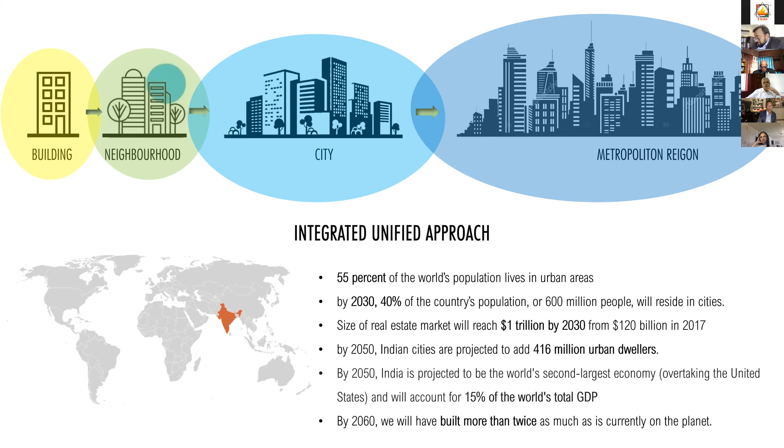One common thing observed in all these cities is that they had a very robust, thoughtful vision plan and master plan. They worked with a proper master plan and spent a lot of time laying down their requirements - something very much relevant to the integrated approach. The city has grown in a very systematic and appropriate manner, and that's how they enjoy the best hygiene and benefits of their city growth.

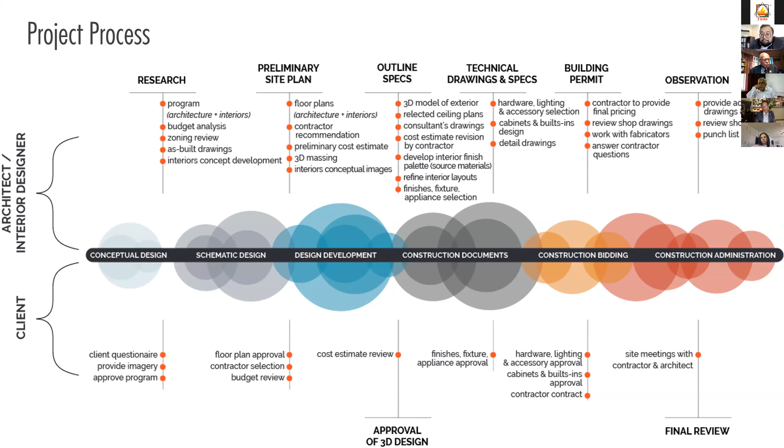Many of the good project proponents spend a good amount of time before the project takes off, and then they get into an actual design initiative. At our office, we call these the 3 golden rules: pre-design studies, all consultant experts should be on board on day 1, and use the best technology software.

Pre-design studies must also be very comprehensive. You must understand the client's aspiration, vision. You must do a detailed socio-economical survey, all environmental parameters, microclimate responses, physical surveys, understand the statutory rules, codes, and other standards that has to be applied, and most importantly, client's budget and timelines. So develop a very robust and thoughtful design program and a project design-based report.

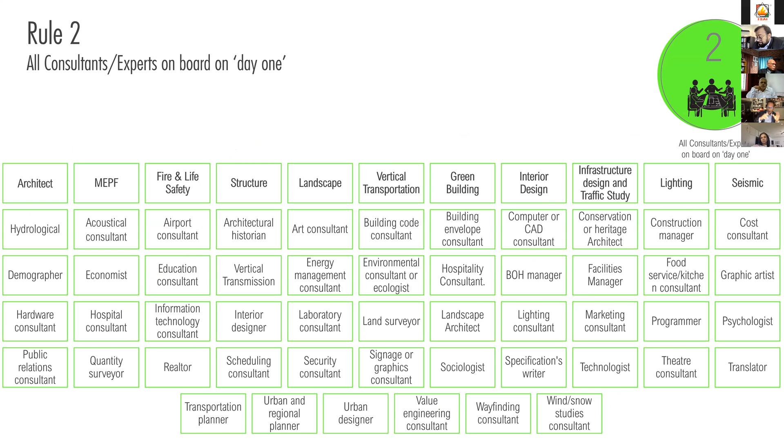These are the array of multiple diverse talent that is required for any project. Like architect Jabin said, being an architect, we have been given that leadership, but many times I also feel guilty, and I must confess - how many times do we really take care of each of these people? So we made a rule 5 years back in our office: all of these people should be on board on day 1, so that you take their very valid and very important inputs right at the inception of the project.

You have a lot of softwares. Today it is technology which is there with you for the drawings and 3D modeling. You have wonderful softwares for rendering and presentation. There are softwares to validate your scientific and engineering parameters. And of course documentation is very important for a large size project. So you must take the fullest benefit of these softwares and ensure that your team is in sync with the current practices which are there in the market.

Revit is one of the best tools. Revit gives you an idea right from pre-design stage up to as-built stage, going from LOD 100 to LOD 200 and so on. And the beauty of Revit is that it can be compatible with BIM, where you have a basic model which gives you 3 dimensions. The 4th dimension that can be added is timelines. The 5th dimension that can be added is money. The 6th dimension is sustainability.

Most importantly, this virtual digital tool goes into the hands of the facility manager who's not doing any trial and error method of a built environment. They maintain, operate, upgrade, and scale up the property in a very judicious manner.

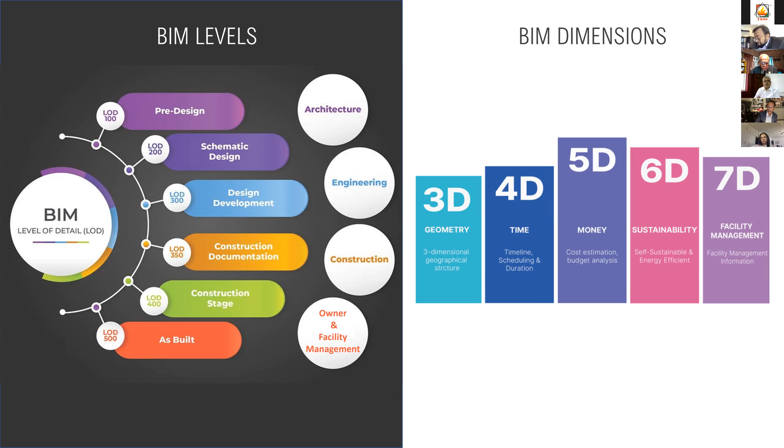Aconex is one of the very important tools for communication. All of you will agree with me that when it's a project of a large size, you have more than 400 to 500 technicians, technocrats, architects, and consultants working on it, added by the suppliers and contractors. To bring all of them onto cloud-based documentation, it's very important that the documentation is also done in a very appropriate manner, and this has really helped us in a large way. This is a very user-friendly software that should be utilized especially for large size and complex projects.

Now I will move on to a few case studies. This is one of the projects where we were blessed with a good client who wanted us to work on a LOD 300 to LOD 500.

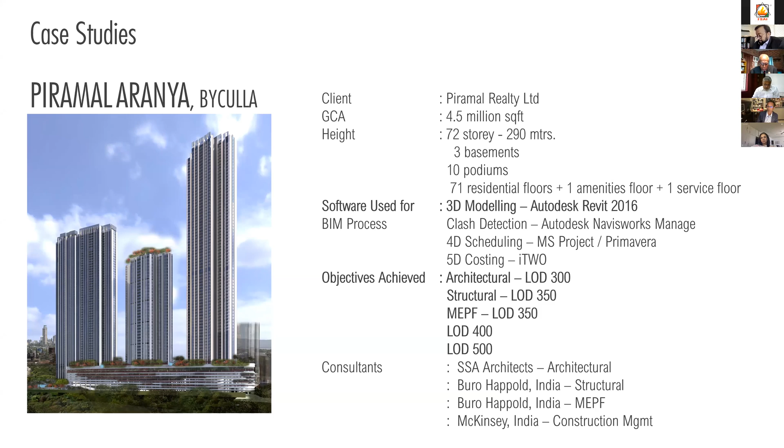That means our Revit model then was further enhanced to the cost index, to the time index, and also to its entire sustainability index. A 72-story building with 3 basements, 10 podiums, extremely complex building, having almost 4.5 million square foot on a piece of land which is just 20,000 square meters, 28 times the built area on the plot. So imagine the kind of complexity it had.

We had to ensure that all clashes were detected properly before it breaks ground, because there is no time to do any mid-course correction for such a high density project. So this was an initiative over a period of 5 months where the entire built environment is captured into a digital model, each and every corner tested, each and every component, may it be mechanical, electrical, plumbing, or firefighting. So the client has an opportunity to do proper value engineering and also manage cost and time. These are today's best practices.

And I think these are allowing us to bring all the talent together. Another project where we were blessed to have a tallest mixed use project.

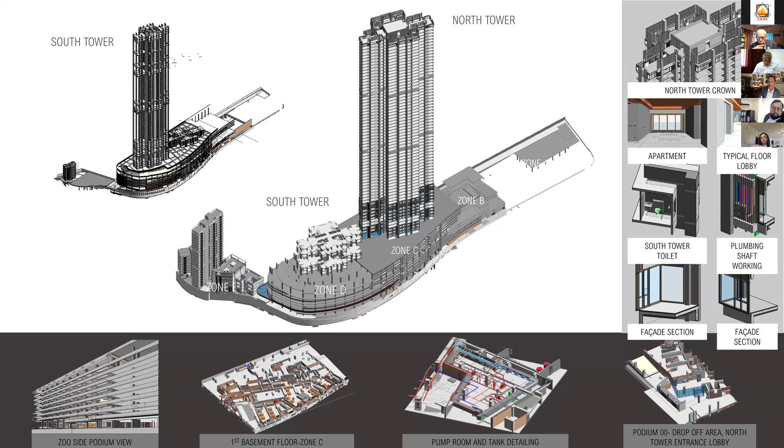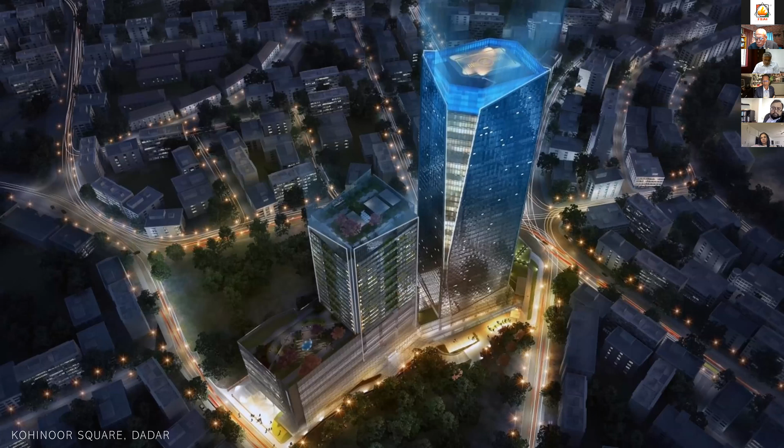Now it's the third tallest in the country, 2.6 million square foot, right in the heart of Mumbai city, which has a helipad on top of it, a tower which has offices, a retail block below, and a luxury hotel on top with the residential building around. So it has, again, multiple involvement of structure, mechanical, electrical, plumbing, firefighting, facade, and so on.

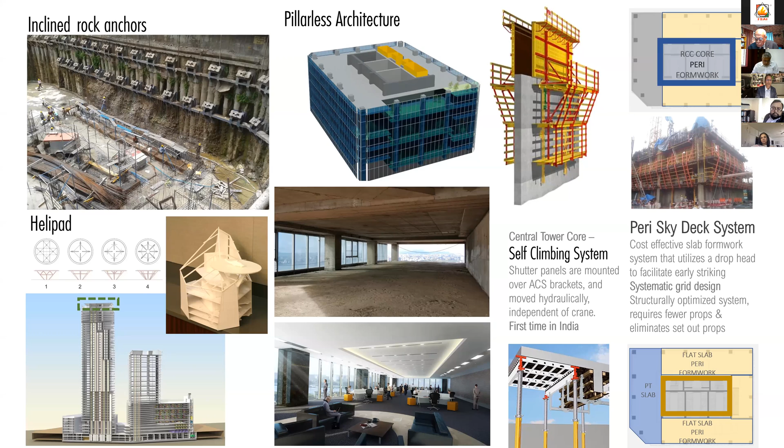So it was very important for us to ensure that, again, we do this project on a software which can accommodate everybody's input and put it together in a judicious manner. This chart explains the automatic climbing system, which can be worked out again in the digital model and so on. This talks about the kind of facade studies where we have Mumbai being very high on cyclonic winds for a 6 kPa pressure.

And what we could do is create a nice energy center where all our DG sets, transformers, everything is accommodated. And through a tunnel, we give these supplies. So again, an example where everything was cracked on a software before it could break ground, and then it was executed. The numbers are astonishing.

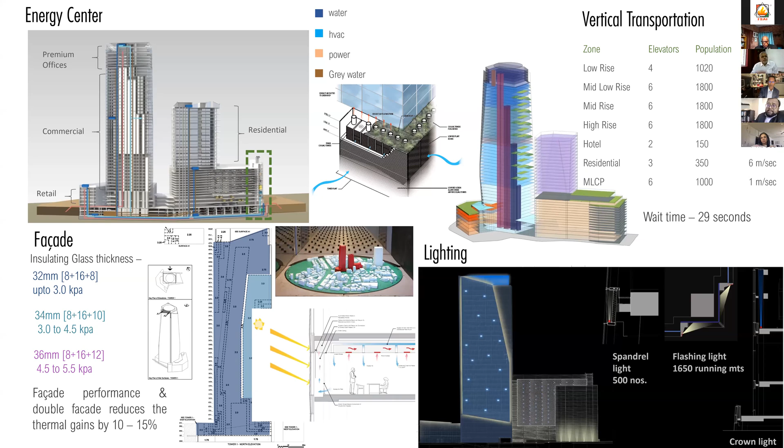1 million liters of water required every day, 34,500 square meters of ducting. So this kind of scale is impossible for any human brain energies to contemplate and work. So again, the message here is to take care of these issues through proper use of software.

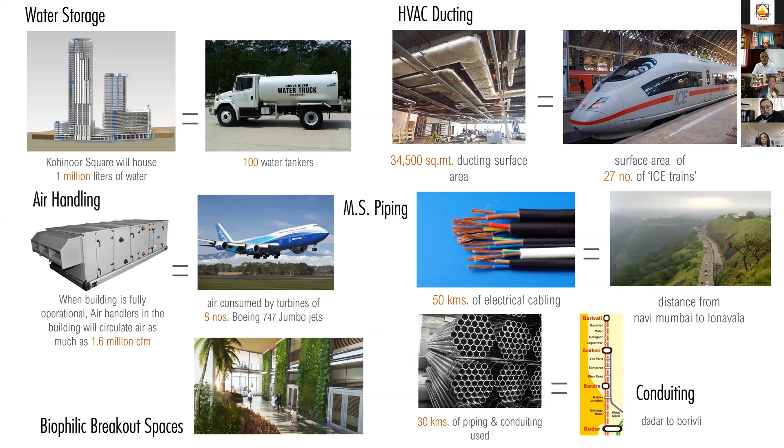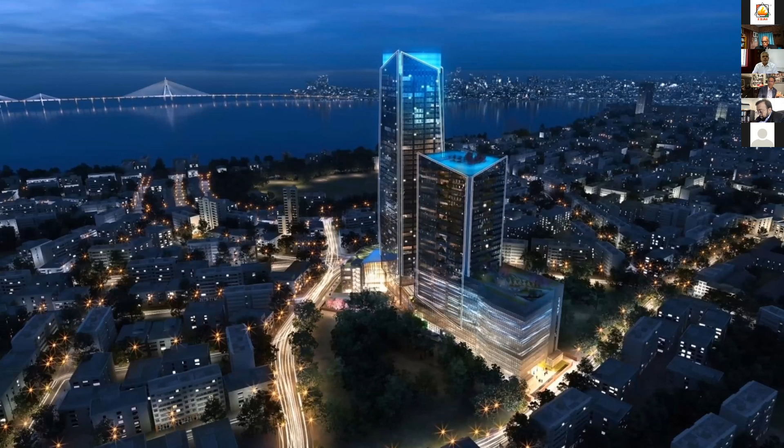So we are happy that this building is going to see its launch very soon. It's a complete flagship project in the city of Mumbai. And after a long time, with a lot of efforts with several stalwarts, we would be seeing this project actually getting occupied. Some of the pictures of the project.

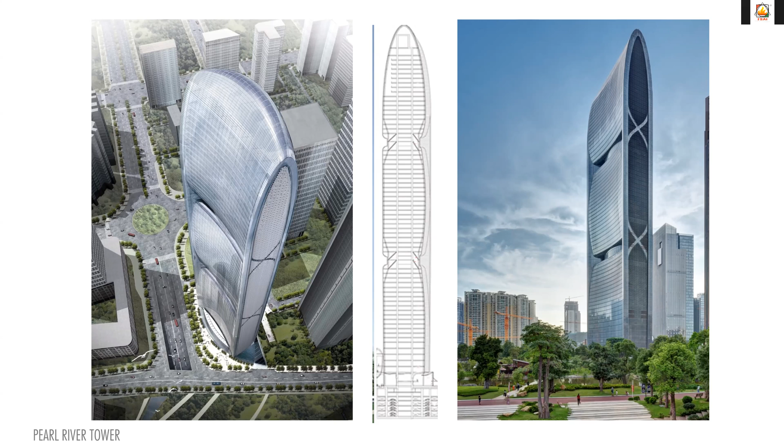Another best project, which I always like to discuss, is the Pearl River Tower on the bank of the Guangzhou Pearl River. This is something where an architect has done a great job. What is available to you when you go tall is wind. So the shape of this particular building is designed in such a way that it's like a sponge. It has those kinds of contours on the building which allow you to harvest wind.

So all that wind which hits the facade of this building enhances the aerodynamic velocity of the wind and takes it to the mechanical floor where there are wind turbines. And those wind turbines generate renewable energy. So tall buildings do not necessarily only consume, they can also generate. This is a great example of how one can think smartly.

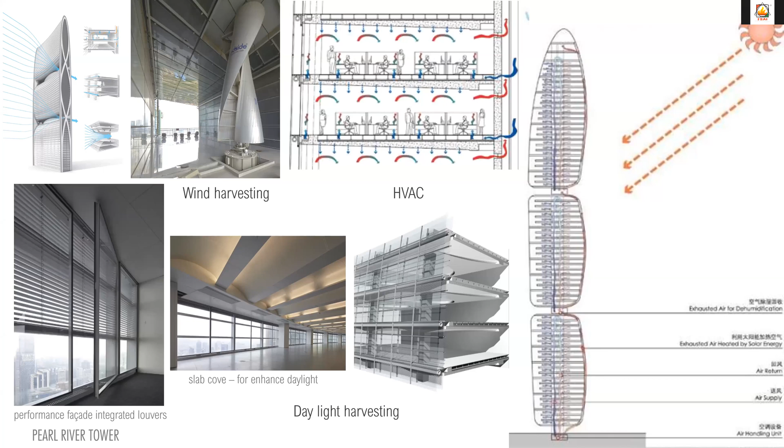All other parameters of enhancement of daylight, having proper shading devices, has been observed here. Many people thought that this may not happen. I was there for the CTBUH conference when this project was presented by SOM, but today you can see it's functioning exactly the way it was designed.

Masdar City in Abu Dhabi, one of the cities in extremely challenging conditions in Abu Dhabi, where all of us know it's very hot, dry, and having a temperature more than 40 degrees centigrade.

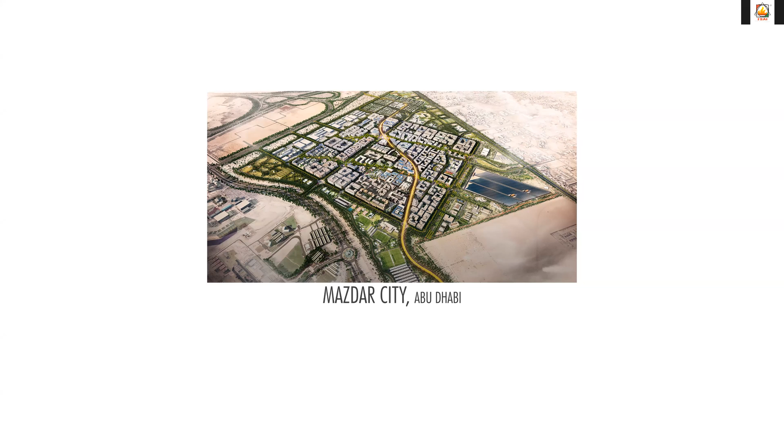But you can see the kind of built environment which has already been created there by all the stalwarts and the masters. So this is also craving for a net zero kind of a city. They haven't yet achieved full success, but with the kind of initiative that has been taken, I'm sure very soon we'll see they will achieve their target.

So these are the kind of opportunities that we have with science and technology, and we can see that it's actually happening.

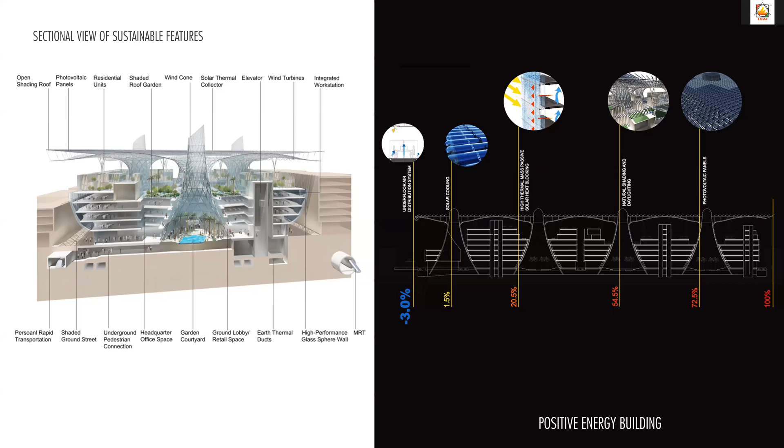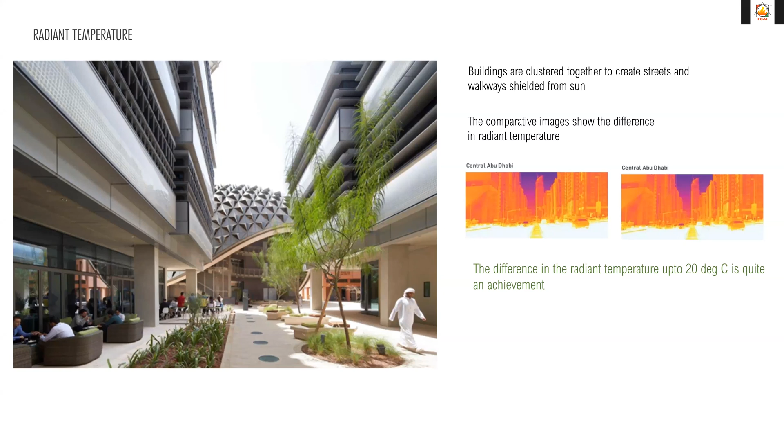This is a science and technology building, a beautiful microclimate responsive envelope. There's a recycled slipper board which gives you a shading device, and at the same time gives you proper daylight. This is a tower which works on renewable energy.

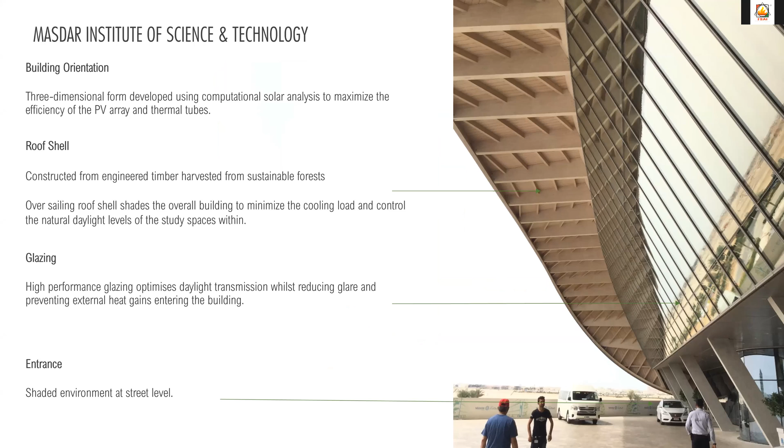There are mist fans on the top which work on solar energy. They give evaporative cooling in a mechanical way, and where you have an active area, you get a beautiful mist coming to you, giving that spot cooling kind of impact. There are so many such measures that have been adopted very successfully over there.

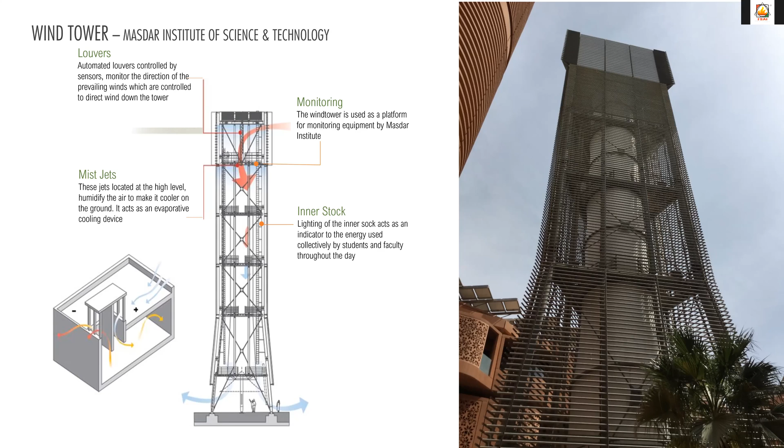My last case study is from our own country, Auroville. This is something absolutely a role model. As many of you must know, this was initiated and conceptualized by a French spiritual leader, where it actually respects nature. There's a nucleus and all the development happens around the nucleus.

Then this particular thought was taken ahead by great urban planners in Auroville in 1986, and they created a galaxy model. Now it is seeing its actual execution mode, whereby the central urban development has given them an okay, and they are going to go live by 2025.

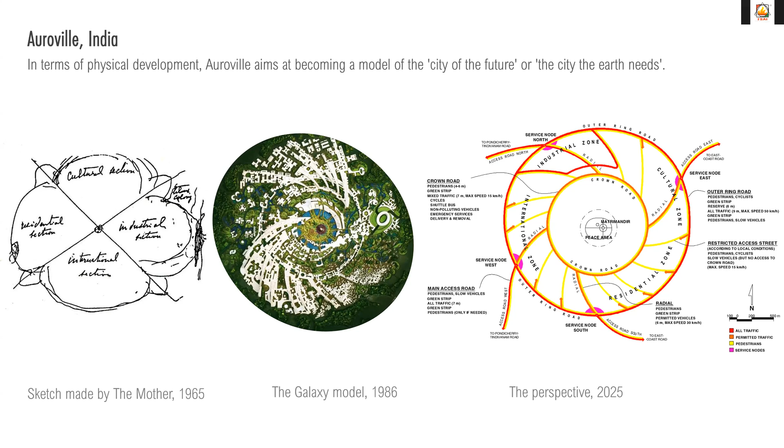This particular 5 square kilometer neighborhood would be developed. It's so brilliantly done by the people, with the people, for the people. Everything is pedestrianized. You can see the maximum pedestrianized distance is 24 minutes, so all the things you need for your livelihood are within reach of a 24-minute walk. You don't have any dependency on mechanical devices.

You are happy because you are in connect with nature. It's almost reaching net zero carbon emission, and it will also be going towards good quality net zero water and net zero energy.

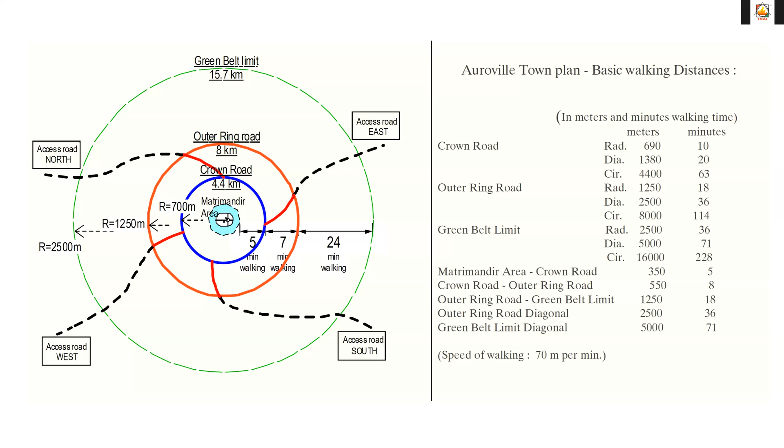So I feel if this kind of exemplary performance has been seen as a good role model and adopted into a megapolis also, it's quite doable that we can create monocentric cities, not polycentric cities. There's a lot one can talk about, but due to paucity of time, I would conclude here and say these are examples that our young peers should see very carefully.

All the people in Auroville are very happy to share their knowledge. During this pandemic, they gave brilliant presentations, and it was a great take home for all of us.

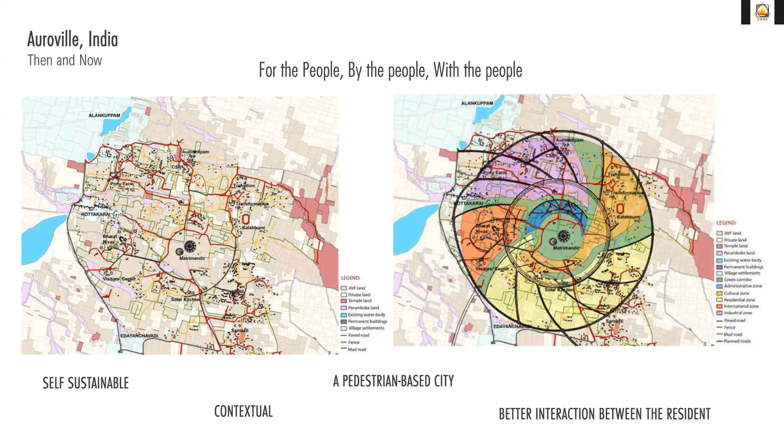So finally, if you want to achieve a good integrated design approach, there has to be an inclusive approach. There has to be a life cycle design analysis. You have to have a good assessment, a proper evaluation, and ensure that all that you have designed is being executed in a proper way.

I would end my presentation by saying, which is very relevant for today's forum: alone we can do so little, together we can do so much. Thank you very much.

Thank you, Mr. Sandeep. We couldn't have asked for better, for such a well expressing the subject, and so nicely covered projects from India to Dubai to China.

Now it's time to introduce my very good friend. It's going to be pretty difficult to introduce a friend, a voracious speaker who claims all his successes because he's a bachelor. And when we are together, he always says, I'm happily unmarried. And Rajiv, your problem is you're unhappily married.

Anyway, that's Ravindra Kumar. He is an architect. He heads two firms in Bangalore, having global practice, Venkataramanan Associates and Prague Group. His strength has been providing innovative design solutions to the emerging project trends in Asia, keen understanding of the complex needs of urbanity, and specialization on laboratory facilities, technology campuses and R&D facilities. He's done very good projects in India, like Lupin, like Boeing, you name it, he has a very good footprint in most places in India.

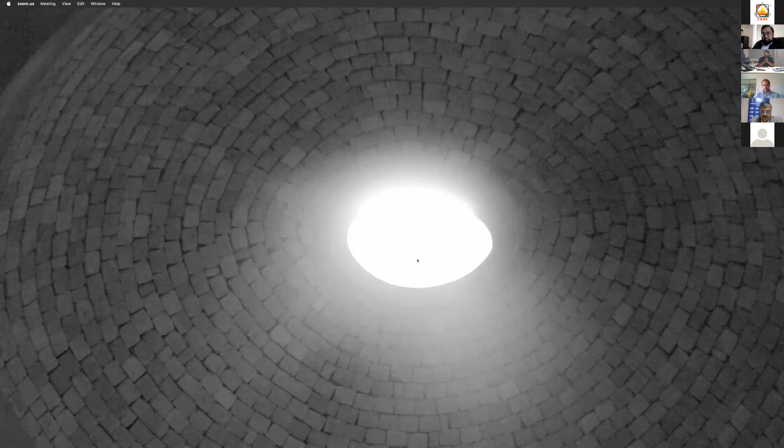The second point is the manufacturers. While we worry about banning plastic at shops when we get stuff in a plastic cover, you should see the amount of plastic that comes to the site when we order material - it is humongous. You get cardboard, you get plastic. So while developers have to find solutions for how to handle each kind of material waste - plastic handled one way, cardboard another - I think manufacturers also have to take a forefront role in how they pack material and consolidate the packaging, because this is the largest kind of debris that happens on site during finishes. When the structure of the building goes up, the debris is actually much lesser than what happens during finishes.

So Kranti, what should we all do? The question still remains - how do we implement this? Is there something I would like to take up? Who should do that? I think a couple of things.

First, with the manufacturers, we all have to take it up probably with CII as an association, and CREDAI has to take the forefront role in educating developers - the smaller, medium scale, and larger developers - on how to handle waste. Apart from that, we have to take it up with the manufacturers and their respective associations in terms of how to avoid non-disposable materials coming to site.

Okay, fair enough. As Karthikeyan spoke about modular construction and prefabrication, now there's talk about 3D printed buildings. Everybody is moving into factory fabrication rather than site fabrication. So even the buildings will be factory fabricated and brought there. This is where the whole concept is moving, and that would mean bringing down the waste at site also.

But tell me, what are the challenges that you see as a developer? The preparedness of the industry members, because it's about the whole integrated process. It's not just about the developer moving there, it's the designer, the architect, all the stakeholders. They need to be prepared for it. What do you see as the challenges to move in this area? Because that will be a truly integrated environment then.

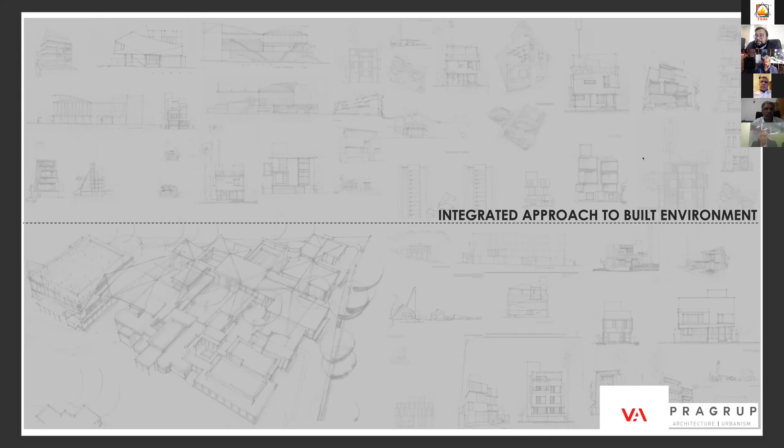To continue with what Shirke mentioned, that was a good capture of assembling all the aspects of what we were looking at. Some of the things we do most of the time as architects or service engineers need to also understand the aspect of how we include a sense of austere understanding to what we do. For example, we have to include the idea to reduce, reuse, and recycle in anything we do. I think when we capture the stages of the life cycle, everything comes included as parcels of that. I will share some examples directly.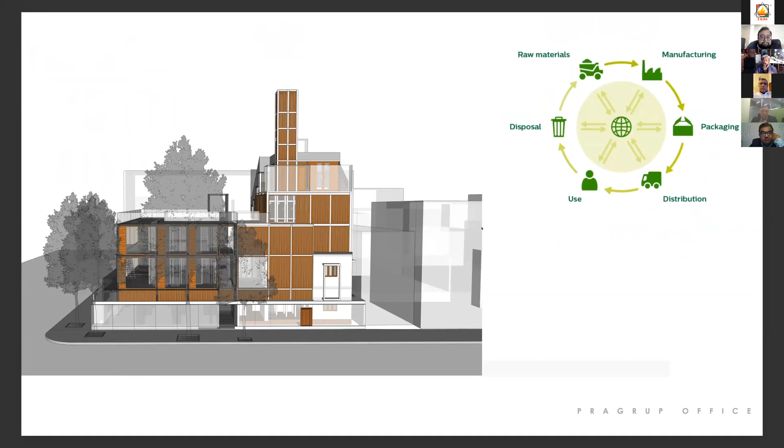For example, this is a simple office we did where there was an existing structure built before independence. We assembled the whole building using the most minimum possible footprint on the structure, in terms of building with re-engineered timber, re-engineered steel, recycled steel, concrete with the maximum amount of fly ash, not messing up the roads and streets around during construction, trying to do prefabrication - so that the whole structure and elements of making such an office space becomes an example where you actually recycle every element that has gone into making the space, and use less material in everything incorporated into making the space where we sit and work and voice opinions to our clients.

It's very important that in such a space, architecture dominates the idea of space. It's very important we articulate and make the experience complete. As Rajiv accurately mentioned, it's kind of a space where we enjoy every form of art - whether it's dance or music or doing design, meeting people, or having a lunch or a dinner or drink together.

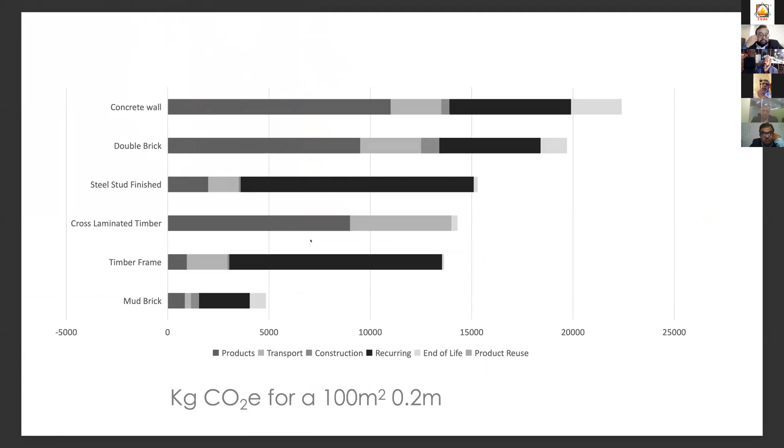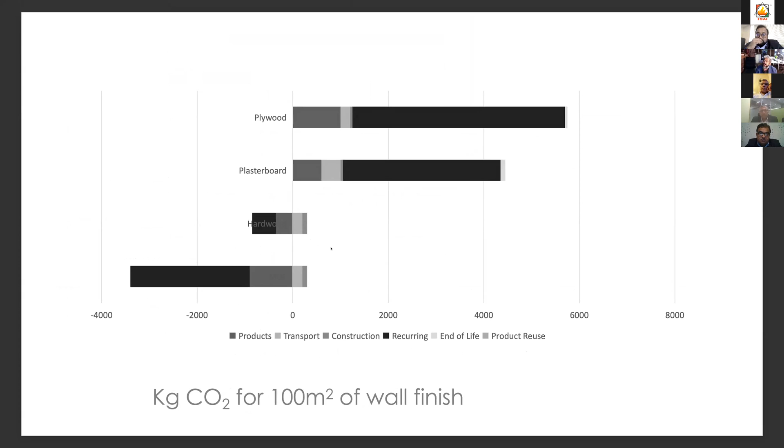It's very important that we measure what we do. This graph explains why we have to rethink the way we think concrete, rethink the way we think brick, how we use steel or any natural material in a new context, and see what is its carbon footprint on the planet. It's also important to measure the accuracy of the wall. Most of the time we refuse to understand specifications by nature, not only its aesthetic, but we must understand by its statistical measure what its impact is on nature.

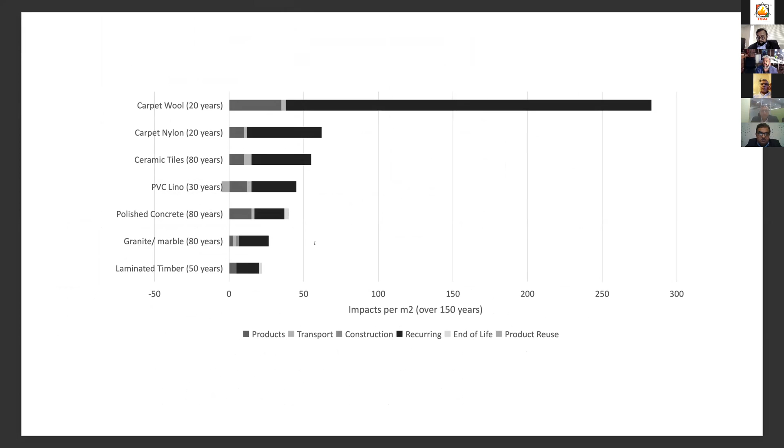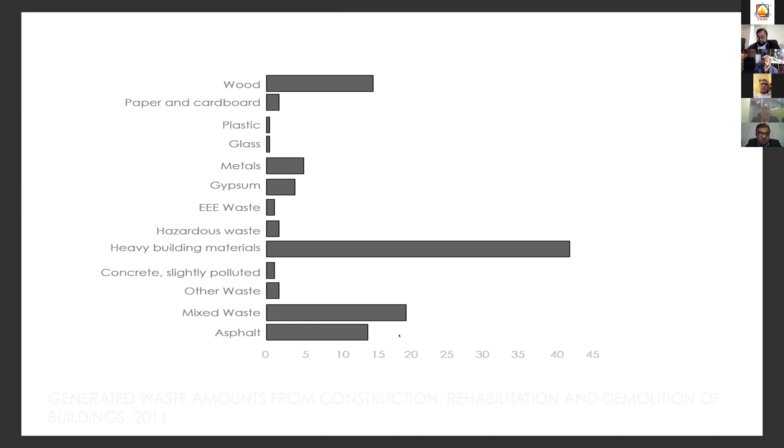These are some slides I can share later with any interested individuals, they can write to me. These are available as embodied energy, related to what happens to the planet. For example, how does wood behave with respect to its generated waste, or in terms of rehabilitation, or when we demolish the building, how much of the material content can you reuse back into working conditions?

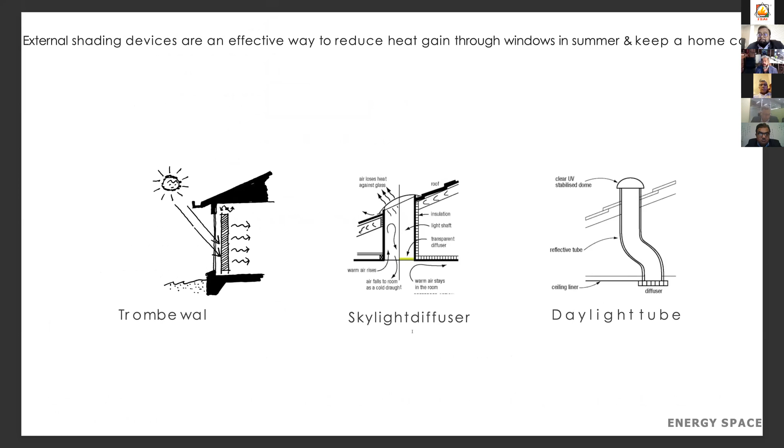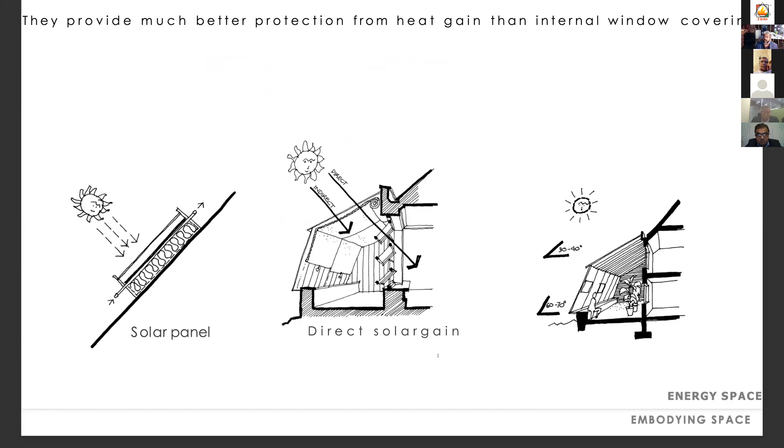Simple elements. I think using passive systems to condition our buildings is very important, especially when you live in the tropical world, moving away from what the West does and being impressed by how it's done there. And it is possible to do this at different scales. For example, these secondary walling systems we have adopted quite effectively in some new building technologies we've done. Even with a system like this, for example with glazing, it's possible to execute for very large structures.

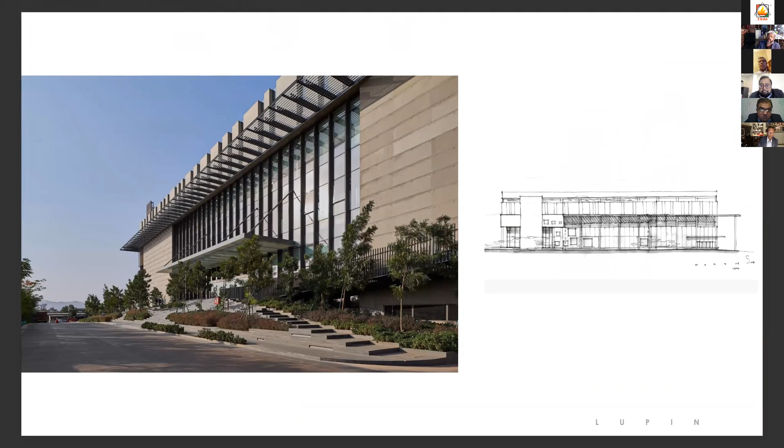What I showed you was our 25,000 square feet office space, which was all built out of steel, timber, and recycled fly ash content concrete. Whereas a project of such a scale, 375 crores, built for a laboratory practice, was almost 12,000 rupees per square feet. But the finesse of how the material was used here, and the green initiatives we apply in an austere building, is also applied here.

So we looked at how we did the landscape, how we connected the glazing systems with intense vegetation, and how we looked at the fin aspects, done out of re-engineered timber, creating very large overhang spaces which allow good shading to the glass, ensuring that the glazing and workspaces inside become part of the landscape.

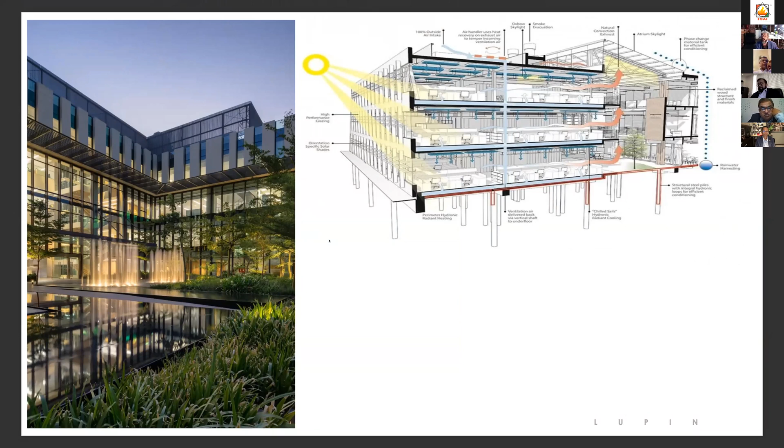You almost feel like it's a pavilion, that you're sitting in a garden. You don't really feel that you are part of a laboratory space or an office space. You completely get immersed into the natural landscape and the intense green that is there at the bottom.

Obviously the landscape cannot grow beyond 18 to 20 meters, and that's when we change the skyline of the building and build up a new crown for the services and activities. Here on the right side you can see the double walling system, an element we introduced to shade the glass that you touch, and you radiate and feel from the inside.

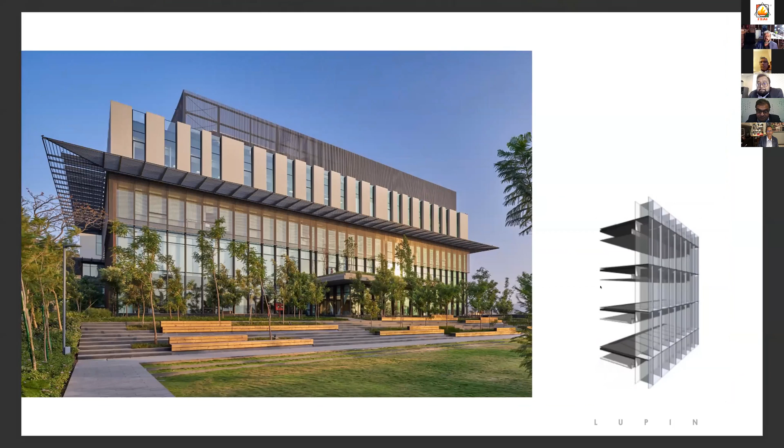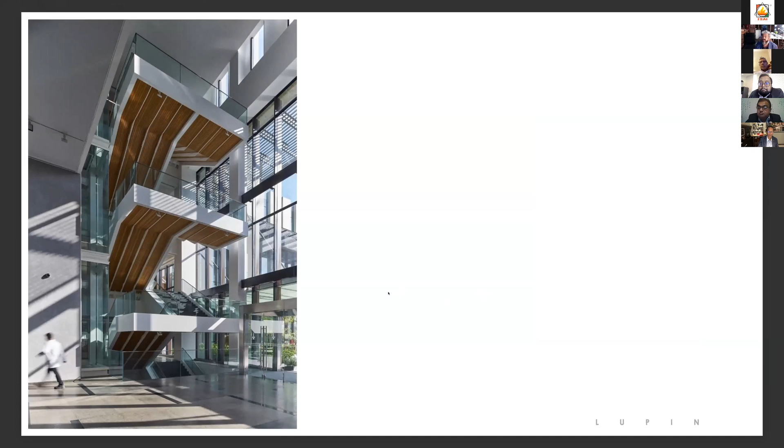Carefully layered materials were incorporated, and in every measure we tried to go back and look at how we can use less material. We don't need to plaster surfaces, you can use a minimum amount of rail work, minimum amount of wall finish lines on the inside. How do you engineer a steel structure that is structurally very innovative but uses lesser steel, rather than conventional secondary elements of shading for large glass surfaces? This was one of our experiments recently completed for a large facility, which was just a G+4 structure.

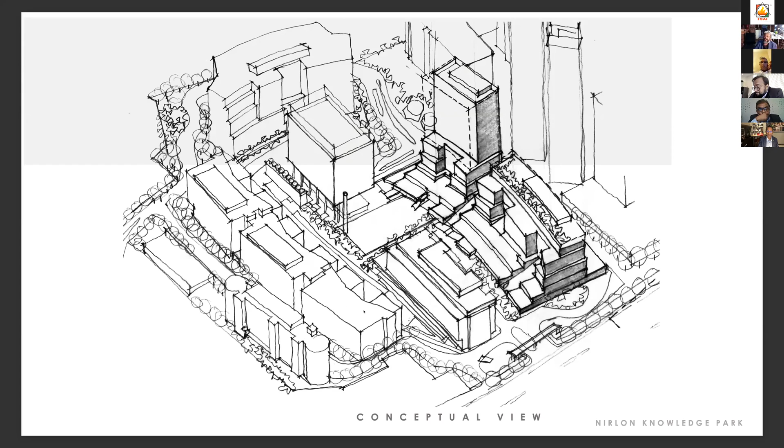Going back, though I started the project in 2001, we are finishing the last tower now. We have gone back and reevaluated every tower in its performance. That's what architects must do, that's what engineers must do - not only finish the job, but go back every 4 to 5 years and see what the performance criteria is.

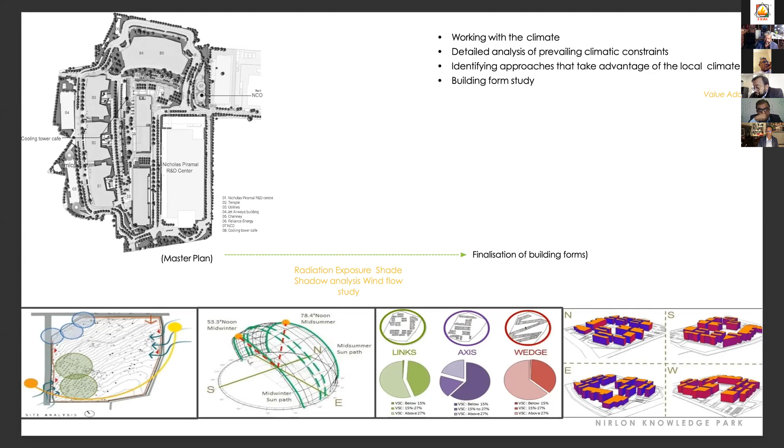How do they actually evolve and redefine the nature of its usage and performance? I think that is very important. And these are a couple of diagrams where we use advanced software to analyze and evaluate how each of these buildings work.

It is possible to demonstrate this on a very large scale project, almost 7 million square feet of built-up area, wherein you can incorporate facts, like what we do in my office and in this building too. The lower ground levels are all cladded with materials that, if they go back to earth, become earth again, such as glass, which is part of silica, but mostly terracotta. These buildings are completely elemented with terracotta and natural slates and stones on the floor elements and the edges of the rampways and walkways.

And this also includes the aspect ratio of degradability. How do they transform? How do they change? When the building eventually, maybe in 100 years, gets demolished, what happens to the footprint of the building? What happens to the material content of the building becomes significantly important.

You can see here the scale of the low-rise structures that we started as phase 1, where we kept a consistent model of using terracotta and glass in 2002, and we continued the language even in the new towers we're building in 2021, after 20 years. I'm very privileged that the client were happy with us as architects and continued to work with us for 21 years, and on many other facilities they're building in other cities today.

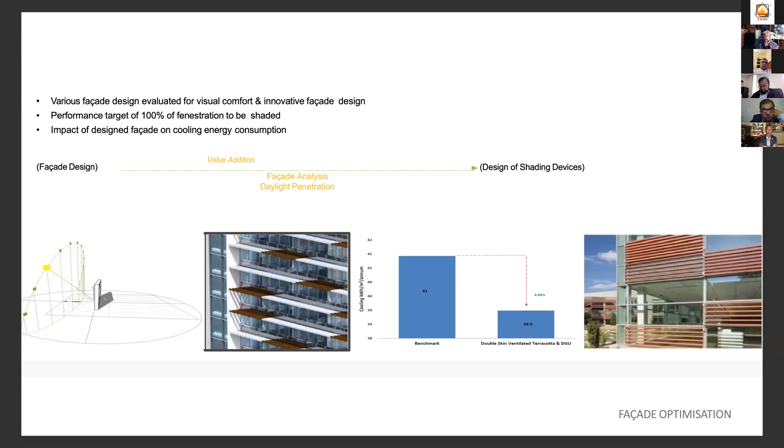Sometimes clients ask me, is it possible to do that even in small elemental structures? This is an 8,000 square foot building we built for a house in Mangalore, in very extreme weather conditions, and we applied the same ideas and thoughts on how to deal with fenestrations, how to use secondary walling systems to insulate walls, how to create water features and allow northeast and southwest breeze into the campus, and how to ensure daylight incidence on the wall is protected from the interiors.

And how do you make architecture and aesthetics appropriate, including that as part of the context and building with context? That would be, I think, a true sense of evolution—to understand how you build in a sustainability environment and integrate everything you believe in into the approach of creating your macro and micro environment.